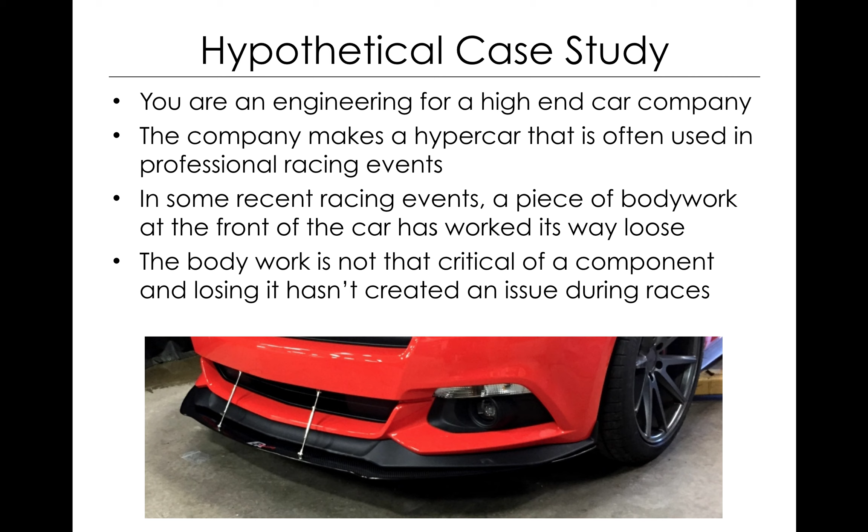Before the next race, you discover that there's some fragments of the bodywork that have gotten lodged in one of the brake ducts, specifically for the front left tire. You believe this could affect cooling. Maybe these components get lodged in there and prevent the components from cooling, and it might lead to a braking system failure, which would be a critical event.

So, what is your job as an engineer? This is one of these cases where this lecture is much better when we can do it in class, and we can talk about this for a little while. What you should do as an engineer - you often get yourself in, not often, but at least once in your career, maybe a few times, a situation like this happens, where something's wrong and you've got to figure out what to do.

The correct answer, if you're working for someone, is to always go to your boss, always go to management, always go to the person above you. At some point in time, as you rise through the ranks of an engineering company, you're going to be the person in charge, and things change a little bit. But for you all, once you get started out in your careers, you're going to be working for somebody. If you get in a situation where you're stuck and you don't know what the answer is, ask your boss. That's always your responsibility, is to ask your boss.

I've been a professor for 10 years - this is my 11th year, actually - and I run into situations every once in a while where I just don't have an answer for a student's question. And I ask my boss, who probably gets tired of getting emails from me about stuff like this, but it's the right thing to do.

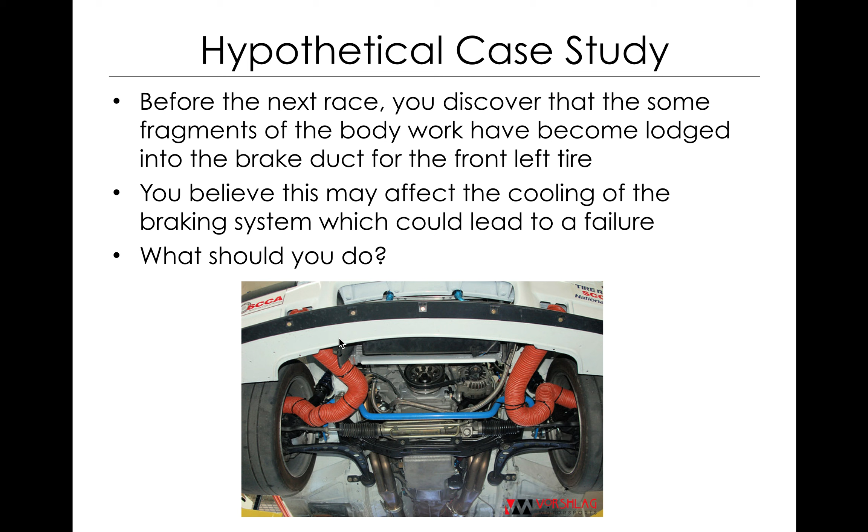So consult your boss, consult management on it. When things get bad is when you talk to management and they refuse to help. That's when you're in trouble. So, in this hypothetical case study, let's say management refuses to implement a solution, saying there's just not enough time to do it, and it hasn't been a problem yet. In engineering failure, 'it hasn't been a problem yet' is a scary thing that's gotten a lot of people killed.

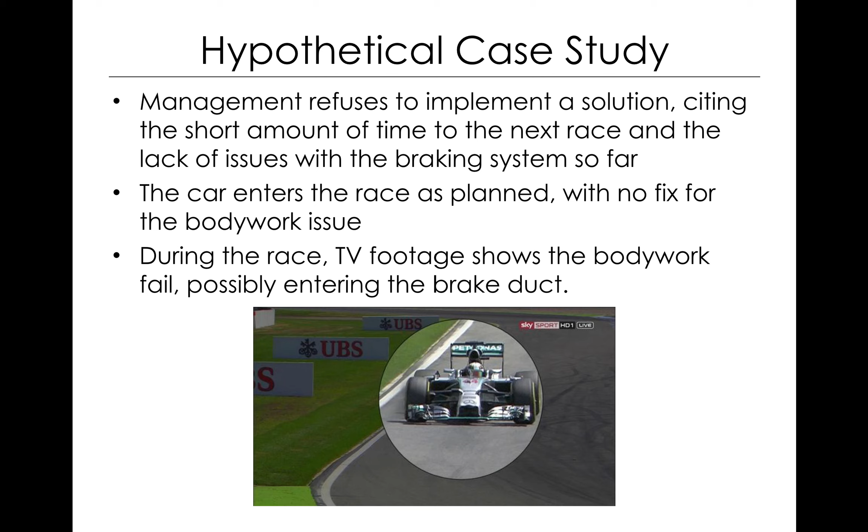So the car enters the race as planned, no fix for this bodywork shedding issue. During the race, there's TV footage that shows bodywork fail and possibly entering the brake duct. The car doesn't have any kind of direct way of measuring the brake temperature, which in the real world it would, but let's say there's not any way of directly measuring if the brakes are okay.

You don't want to bring the car in for a pit stop, because then you're going to lose any chance of winning the race or placing well. So there's this rumor that there's a competitor out there that has a thermal camera that might be able to see an increase in brake temperature and see if things are okay. You don't really want to talk to the competitor because they're the competition, right? You're admitting a weakness or a flaw, or giving them information they wouldn't have otherwise. So what do you do?

Again, it's better having some discussion here, but you've got an opportunity to get data, and yeah, you have to go to a competitor - you have to eat a little crow to do it. But you should, right? I mean, there's no real loss other than maybe admitting you don't have temperature sensors on the car, or admitting maybe there's a design flaw that your competitor could capitalize on. There's not a big loss in this, so sure, why not?

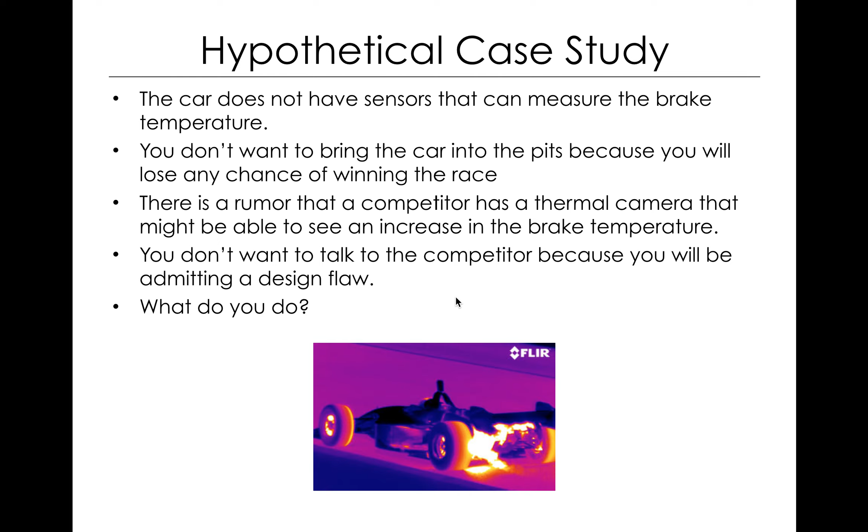So that's something you could bring as a case to management, saying: we lose very little and we can gain quite a lot, and this is a situation that's starting to get a little risky. If you can explain the risk, people will listen. So you pass the request to use the competitor's thermal camera to your team's management. They refuse.

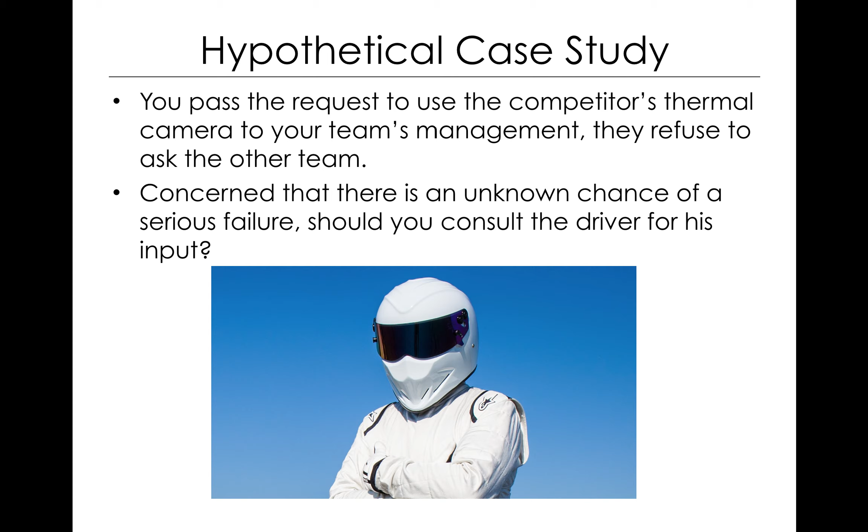So now you're in a situation where you think there's a problem, and you have no way of getting evidence, and the driver's the one out in the car and is going to be the one most directly affected by this. Should you consult the driver for their input? I think most of you, based on discussions I've had using this case study in the past, would say yes, especially if you were the driver, you would want to know.

Management says the driver's a professional and would rather not know, and should focus on racing, and if something happens, it happens. During the last lap of the race, the car's brake rotor overheats and fails. At the end of a long straight, the car goes off the course, hits a wall, and the driver is killed. After reviewing the failure and looking at why this happened, it was determined that the bodywork that caused this whole thing, the root cause, was completely unnecessary and removed from future race cars.

So where's the fault? I think it should be obvious at this point that it's sort of a tree of faults. In fact, you encounter fault trees a lot when you're trying to trace the root cause of a failure. That's like the 5 whys we talked about a long time ago in quality, where you ask why 5 times to get down to the root cause of things. But there's a lot of different places this could have been stopped. This is hypothetical, but it's based on a real life study we'll talk about, a real thing that happened where people were actually killed in a very high profile failure.

And who is at fault in a situation like this? Is it the engineer that tried and got shut down by management? Is it management? Management's got a lot of things to worry about, so it's not just one engineer bringing issues to them, not just one situation they have to worry about. So it's a combination of factors. A lot of it, from a legal sense, gets pretty tricky, and it kind of ends up being whoever gets found at fault by a jury or a judge in a bench trial, or what looks bad enough that things just get settled.

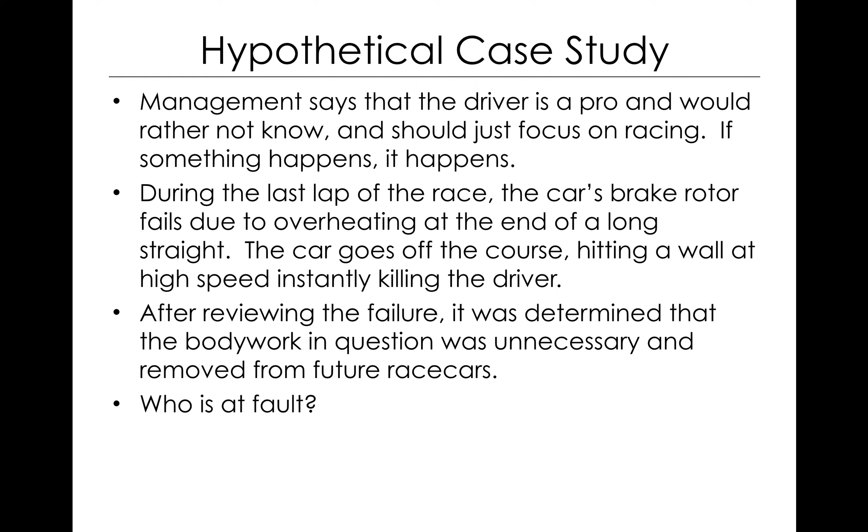It gets a little tricky, but usually it's more of a management and culture issue that's at fault in a lot of these situations. It's a culture of not addressing problems, a culture of not stopping and fixing things, a culture of not listening to engineers. That's usually at fault in situations like this.

So this was derived from a very real failure, and a lot of people at this point say it's Challenger. It's not Challenger. Challenger is an interesting failure you hear a lot about in engineering school. This is actually the Columbia orbiter, a space shuttle, but the Columbia failure. So this mirrors a lot of the details that happened in the space shuttle Columbia disaster. The shuttle was launched on April 12th, 1981 — that's literally the day I was born — flew 28 missions and was lost on February 1st, 2003. All 7 crew members were killed.

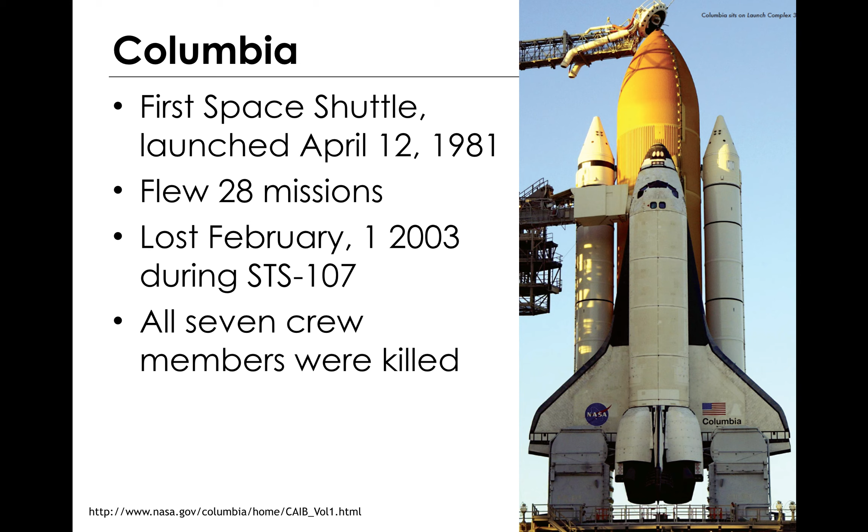A little background: in prior launches, 4 specifically that were known, there was loss of foam in whole or part from the external tank bipod ramp. This is the big orange tank that holds the liquid hydrogen and liquid oxygen for the space shuttle main engines, connects to the orbiter with this little bipod, and there's a foam ramp on the front to make it a little more aerodynamic. I think it's just urethane foam, sprayed on and carved, kind of like expanding foam that's then carved into a wedge or ramp shape to be more aerodynamic.

This foam had been seen to come off. It was common enough that a name was given to it. These were all successful launches.

There's a moped going by now.

During one mission, 2 launches prior to Columbia's final launch, a camera was placed specifically to understand this problem, this phenomenon. On this mission, the one that they put the camera to watch, a piece of foam was shed and it struck the left solid rocket booster, leaving a large dent.

What should NASA have done at this point in time? The easy answer is they should have fixed it. And that's always the answer in a situation like this—they should have fixed it.

The issue you're dealing with on the space shuttle is it's the most complicated system on the planet at the time. They were talking about it being one of the most complicated things ever designed by mankind. There's not just one problem that needs to be fixed—there's lots of problems that need to be fixed, lots of things that need to be changed, lots of things that need to be addressed.

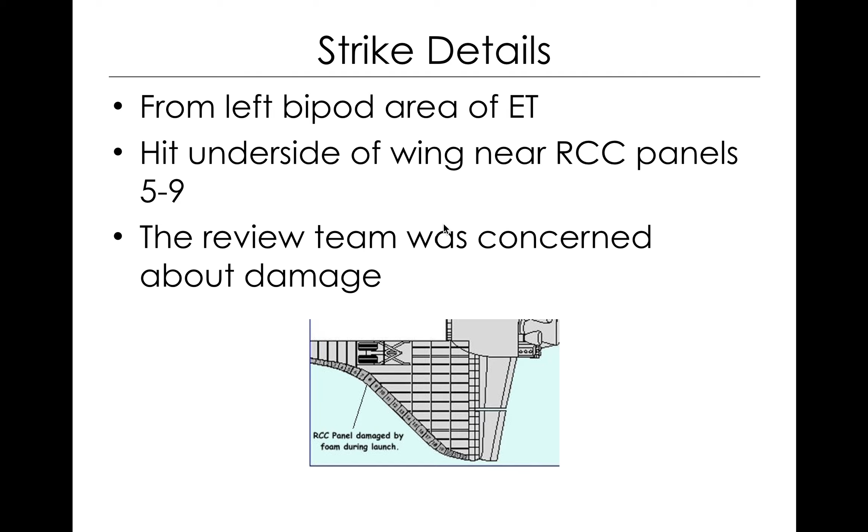Okay, what do you do now? If you're on that review team, what do you do? Inform management, right? That's obvious. But past that, what are your options? How do you know how big of a problem this is? Because now you have an orbiter that's already been in space for a day, with 7 people on board, and it's got a potentially damaged thermal protection system.

And your options are very limited at this point in time—maybe there's no good options at this point. I'll talk about some of the potential options in a second, but that's something that's very common in failures: there's usually a window to address them, and the earlier, the easier it is. At some point it becomes very difficult, and at some point it might even become impossible to address failures. So it's always good to prioritize and fix things as soon as you can, because at some point it's going to be very expensive or very difficult to address them.

So try to get more information, right? If you're dealing with uncertainty as an engineer, can you get more information? Can you get some hard data? So someone had the idea to maybe ask the Department of Defense if they could get imagery from one of their spy satellites.

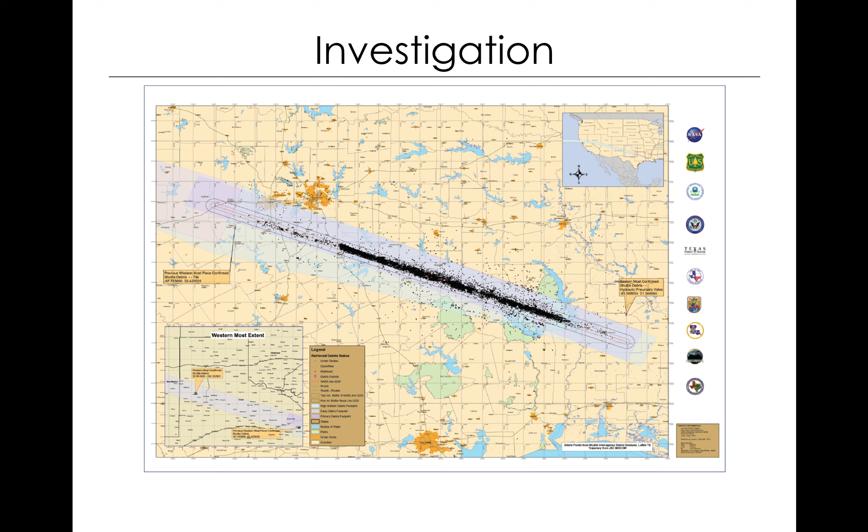That's when the formal accident investigation started. The orbiter broke into lots of small pieces and some big pieces, scattered all across Texas and some of the surrounding states. At that point, the best possible explanation for why it happened needed to be determined.

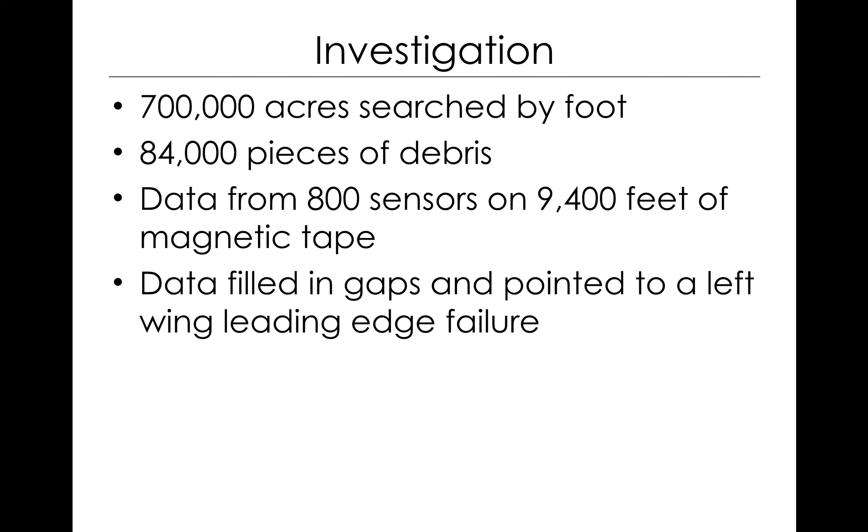So 80-some thousand pieces of debris were found. Data from sensors on magnetic tape that had made it to the ground was retrieved. This was able to fill in some of the gaps from telemetry, and that data pointed to a left wing leading edge failure, which is consistent with where the foam strike occurred.

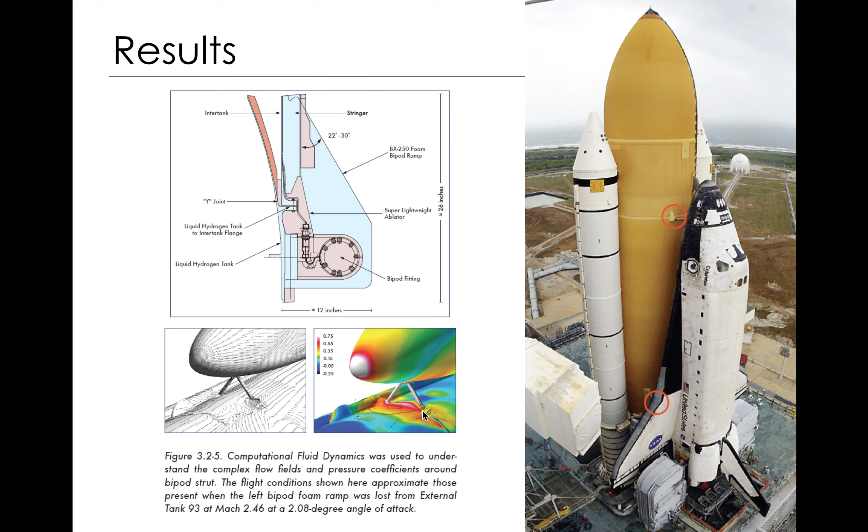You can see the leading edge of this bipod sees quite a lot of pressure here, the white being the highest pressure, the stagnation point here at the nose, the leading edge of this. But you can see you're starting to get down closer to the boundary layer here, and this ramp doesn't have that much pressure on it. So really not a super critical area as close as it is to the tank.

So going back and looking in more detail at previous launches, in 80% of the 79 missions where there was imagery, some type of foam loss was seen. 10% of that from the left bipod ramp, so somewhere around 6 or 7 missions. 30% had no data, so there might be more.

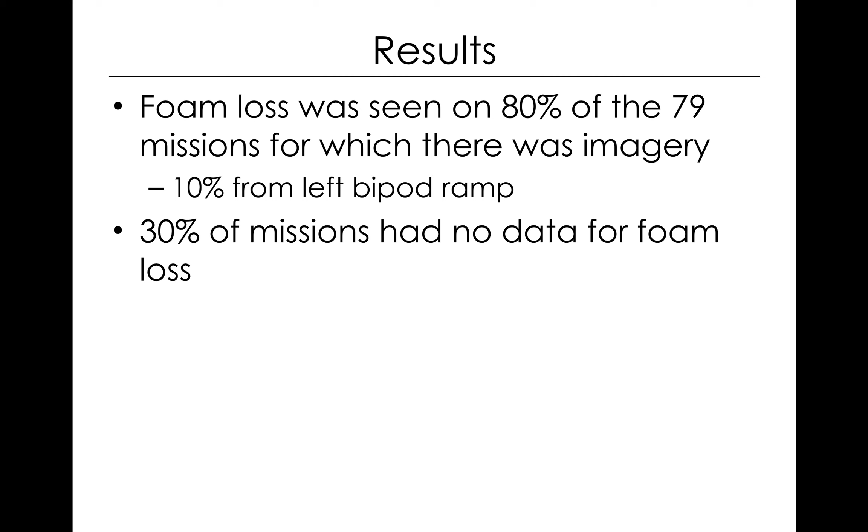So from the evidence, from the magnetic tape, from the data, from the telemetry, during reentry they detected some sensors, some overpressure sensors I believe, in the tires, left landing gear. You could see how if hot gases were getting in here, it would heat up the landing gear bay and heat up the tire, causing the air to overpressure. There was some loss of sensor data in this area from wires burning through or sensors failing.

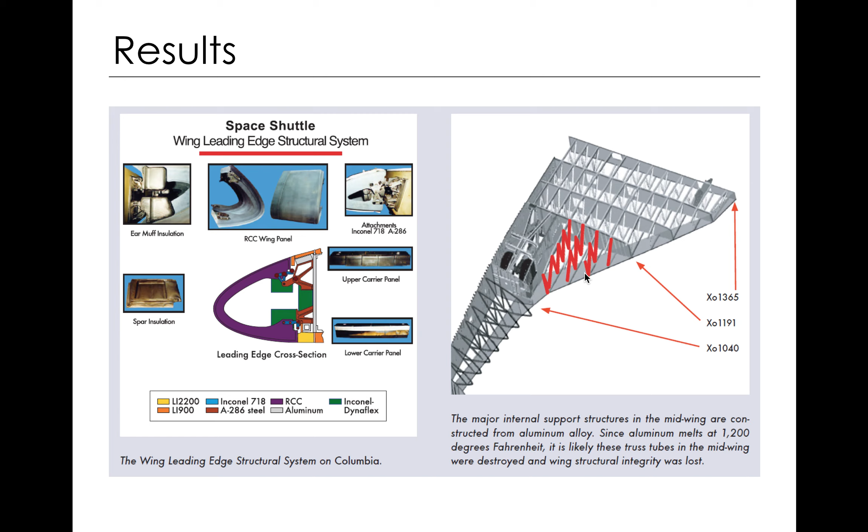So there was a lot of evidence that something was going on this left side, and specifically that it was getting hot in there. And then that combined with the video footage that showed the foam strike in this area, combined with the test that showed that the foam in question could actually penetrate the reinforced carbon, made it fairly conclusive that this is what caused the Columbia orbiter to be destroyed.

So fairly conclusive. Again, you don't really know a lot of failures. You sort of have to, with the evidence you have, infer what happened. But it's very, very high likelihood this is what caused the loss of Columbia.

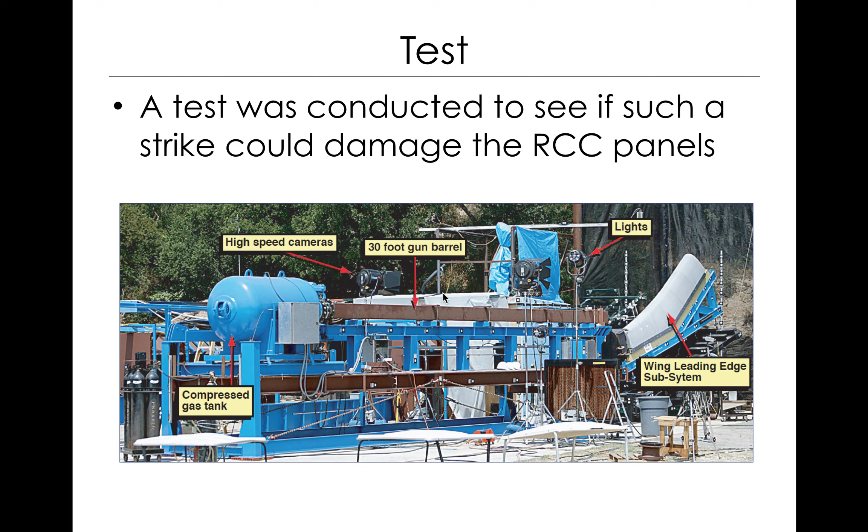So who's at fault? What you find if you read the accident report is they end up citing the culture of management at NASA and how they listen to the engineers, how they listen to the technical people, how decisions are made about what's a turnaround issue, what's something that should be addressed.

And if you go back to the Challenger report, Columbia report, that's what we're talking about. If you go back to Challenger, you see the same pattern where organizational decisions of an organizational culture was faulted, and that's a common theme in engineering failures.

In the modern era we just know so much about how things fail that there are very few surprises, where we had no idea this thing was going to fail or fail in this specific way. There was a lot of that historically with fatigue analysis, when machines started turning millions of cycles and metal shafts that were fine for 1,000 cycles all of a sudden snapped in half at 5,000 cycles or 500,000 cycles.

That's a new phenomenon. The Tacoma Narrows Bridge, where you had aeroelastic flutter causing a bridge to fail - that didn't happen on shorter spans, so it wasn't even something they were expecting at all. The civil engineers didn't know they had to be aerospace engineers, or have aerospace or aeronautical engineers involved, at the time, in their bridge design.